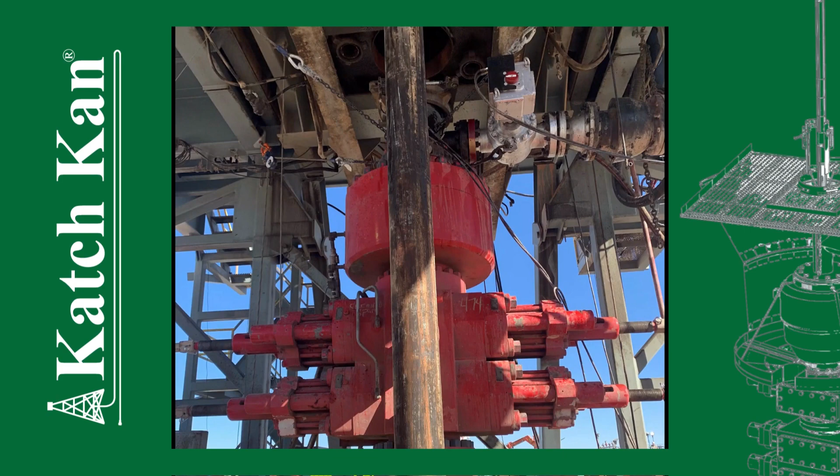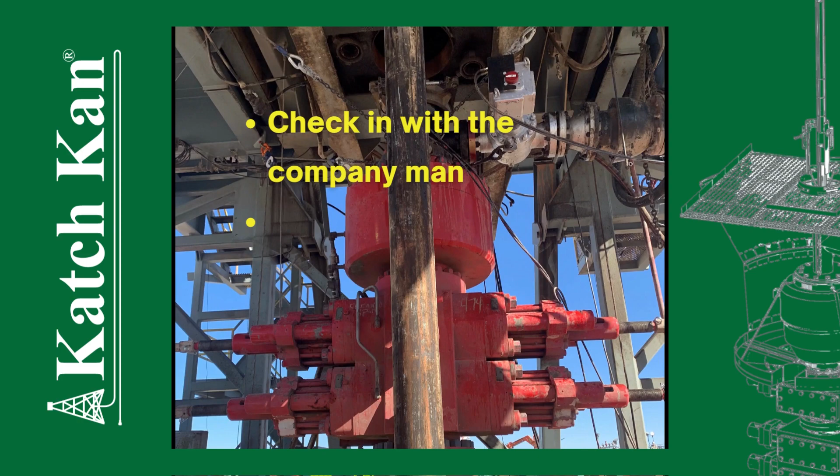In this video, we are going to demonstrate how to rig up the zero spill system on the BOP. Before you can rig up, always ensure you have the following ready to go. Check in with the company man, complete JSA and have a tailgate meeting with all parties involved, have on all PPE and ensure it is all ready to go.

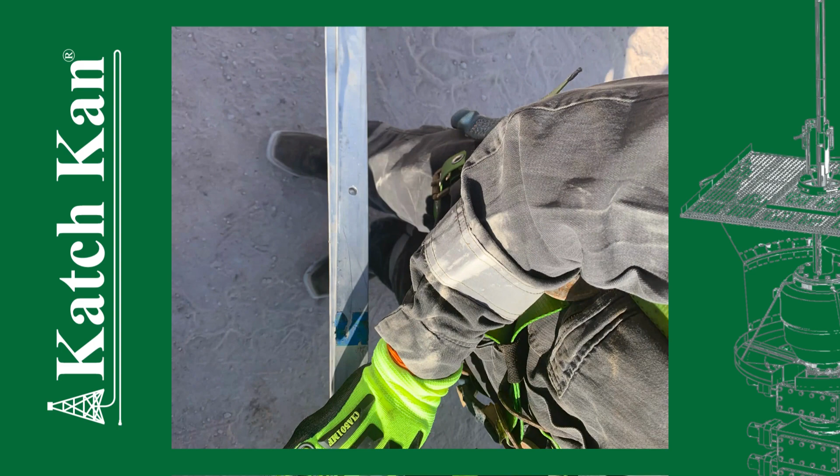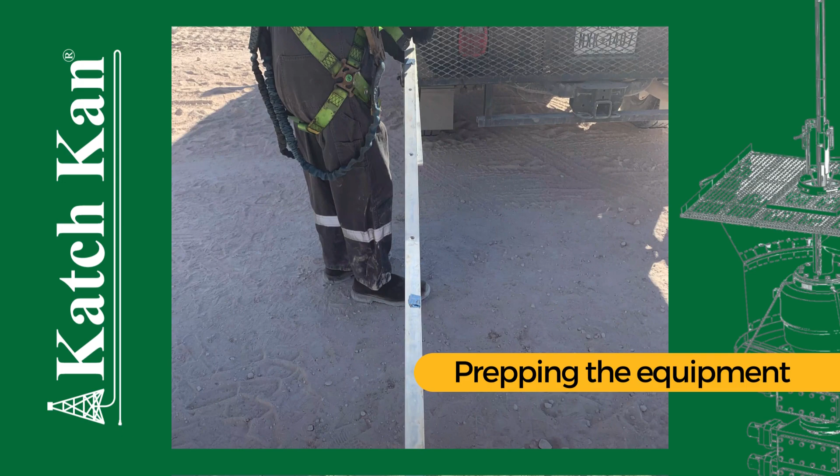Once you get the go-ahead from the company man, you want to start prepping all your equipment that is going to be used for the rig up. One person will start by putting the support bar together. To complete this, you determine the size you will need. Once this is determined, you will align the holes provided and put 9/16 bolts on the first and third hole, then tighten down with a 9/16 wrench.

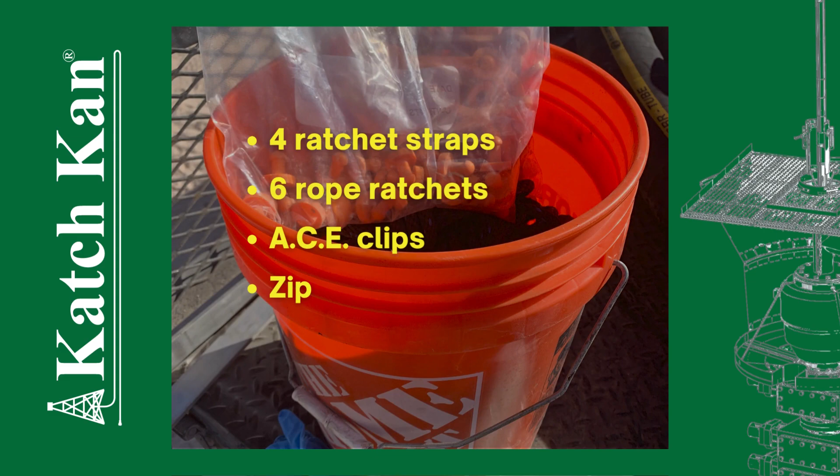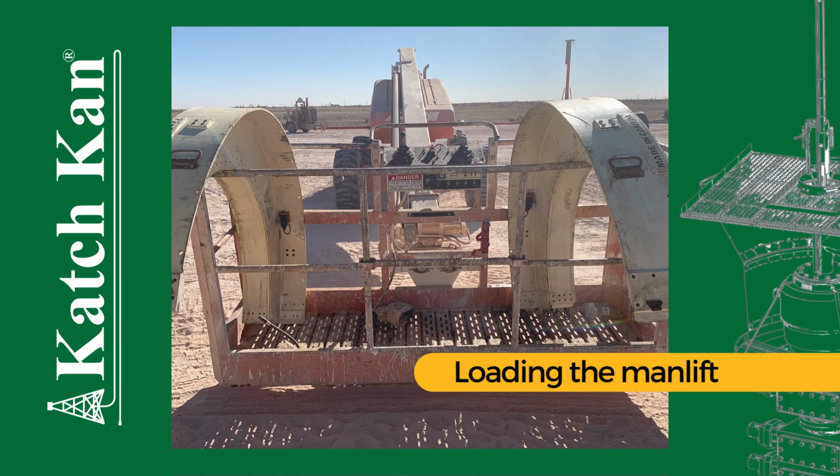You want to ensure you have your bucket ready with at least 4 ratchet straps, 6 rope ratchets, A.C.E. clips, zip ties, and 2-inch duct tape. Next, you want to load the man lift with the equipment you need to take up to the BOP. Starting with the low pro, you want to load 1/2 of each side facing inward. This will help later when it's time to hang the low pro. After loading the low pro, you will load the bucket of consumables, H-seal, and your ace as well.

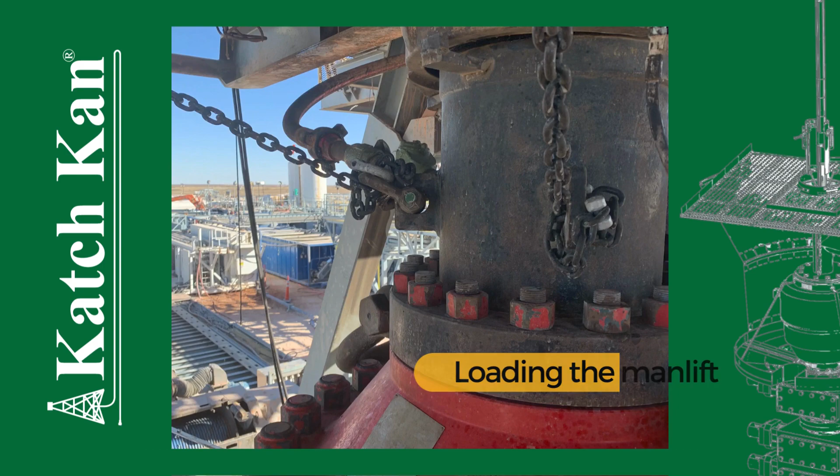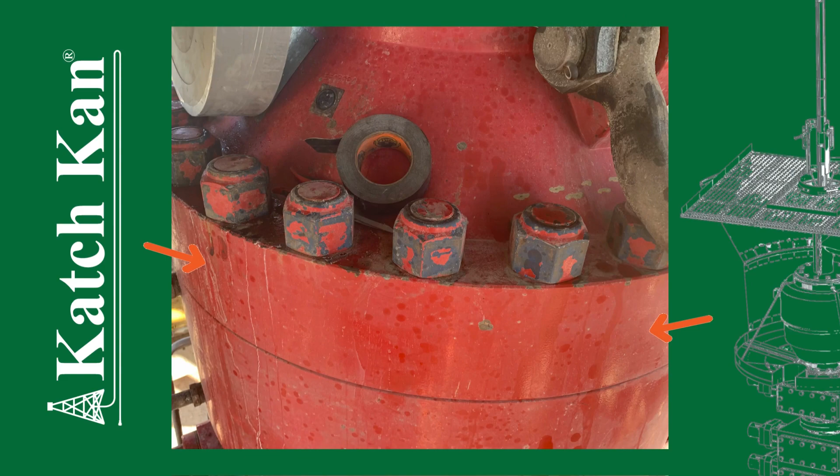Next, you need to go up on the man lift and determine any obstacles you may encounter during the rig up, such as, and not limited to, 2-inch lines, tiebacks and turnbuckles, orbital valve, and any other lines coming into the BOP. For this rig up, it has been determined to place the low pro on the Hydril due to obstacles in the way. This is the best setup for this rig up.

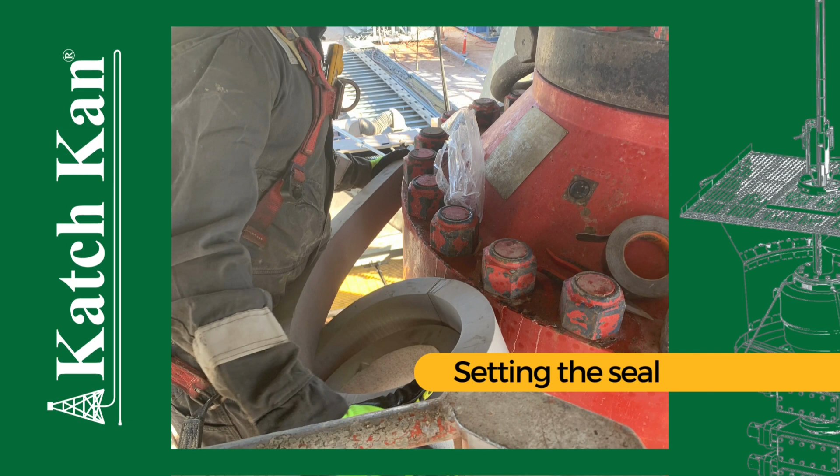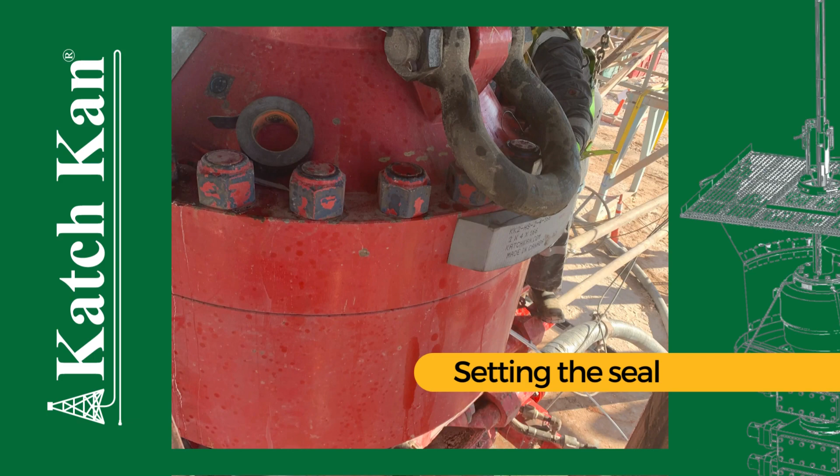The next step on the rig up is setting the seal. The location the H-seal will be placed must be as clean and dry as possible. Once you've determined where you're going to rig up the low pro, you will unwrap the H-seal from the plastic. Handing the H-seal over in a clockwise motion, you will start wrapping the seal around the determined location.

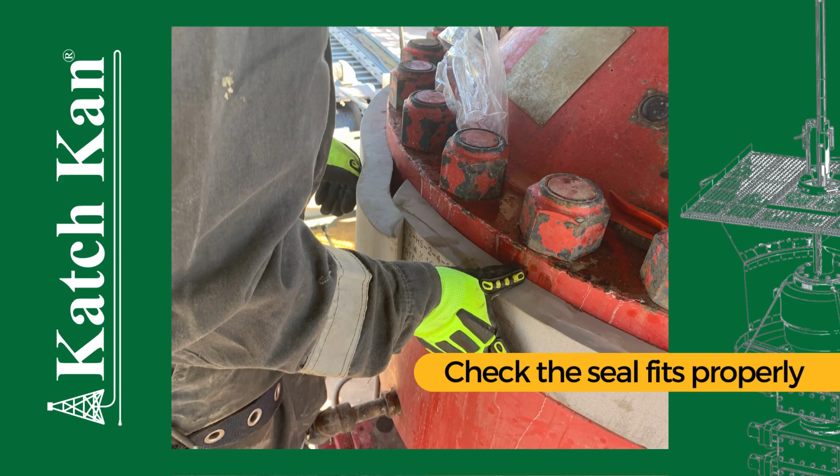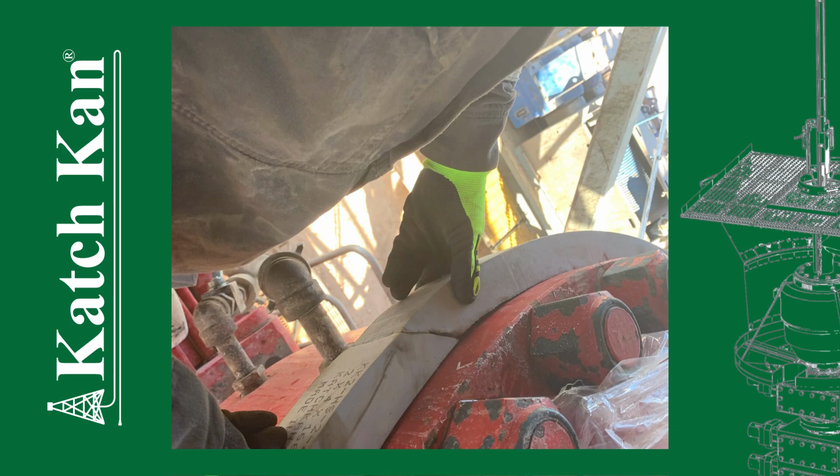Once the H-seal is wrapped all the way around the determined area, the next step is checking if the H-seal needs to be cut to fit properly. Not all H-seals need to be cut. You only cut the seals on a need-to basis. When you must cut the H-seal, you need to cut the H-seal at a 45-degree angle to match the other half of the seal. This is done to prevent any gaps in the seal that may cause leaks from the system.

After the cut to the H-seal has been made, your next step is taping the H-seal to stay in place. To accomplish this, you want to start from the right side of the H-seal past the meeting point, placing some tape on the H-seal. Then you pull the tape tight in a clockwise motion, handing it over to the person on the other side. You continue this until the H-seal is deemed tight enough and will not slide up or down.

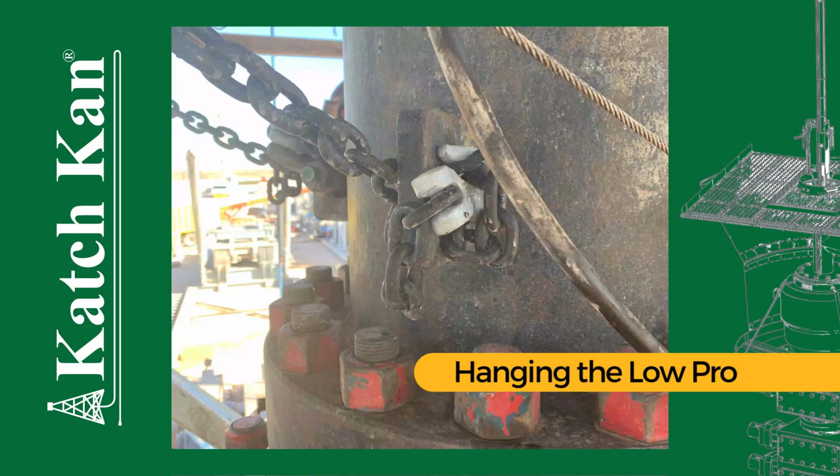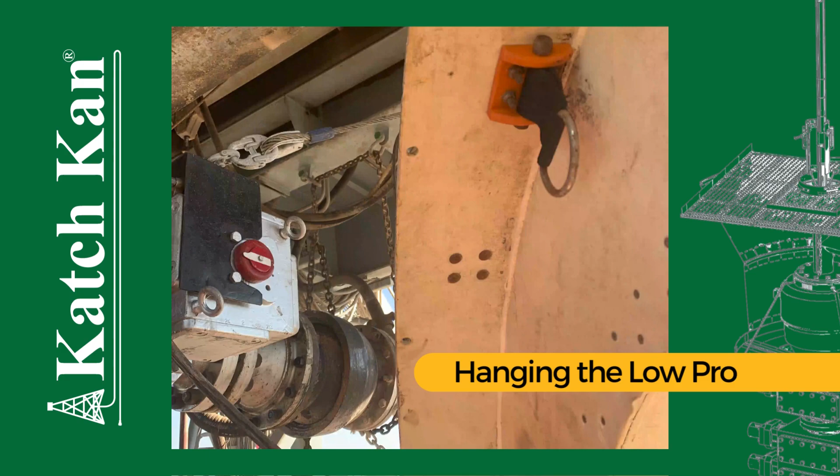We have now come to the next step, which is hanging the low pro. Using 4 rope ratchets, you hand 2 over to the person on the other side of you and keep 2. Next, you will hang the ratchet portion of the rope ratchet on the eyelets of the BOP. Then you will both open 1 rope ratchet each on the same side. It's recommended to hang the first half of the low pro on the non-mouse hole side first. Your partner will then give you the hook end of the rope ratchet from his side.

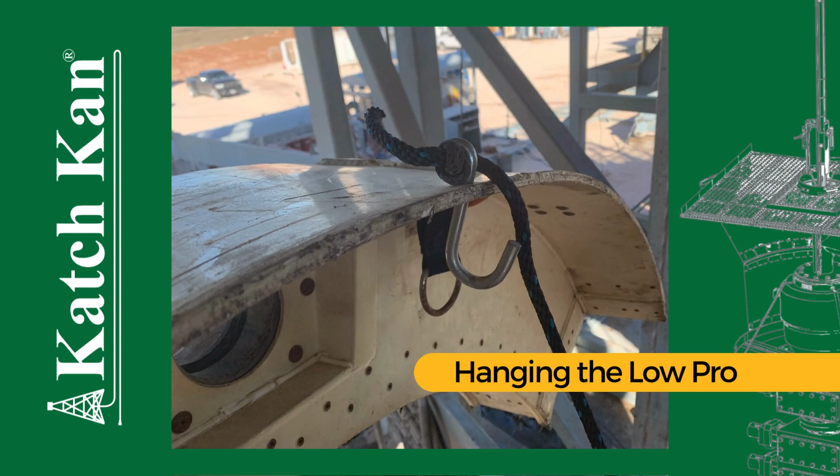Once you have both ropes, you then will place the hook from the rope ratchet into the pre-drilled holes on the low pro. To have the best balance possible, you want to use the holes closest to the D-ring on the low pro. Next, you want to wrap the hook 3 times with the rope to prevent the hook from slipping out of the hole. After both hooks have been placed on the low pro, next you will slide the low pro out of the man basket slowly to the person on the other side.

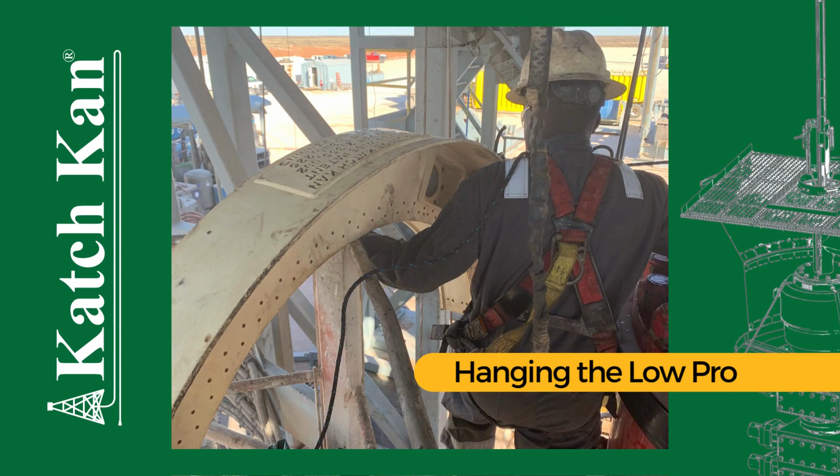Using the rope ratchets, pull up on the low pro side and pull out the slack of the rope on the ratchet side. Do this until the low pro is set at the right height to be placed. Follow the same steps for the mouse hole side of the low pro to be hung. See an example clip on the next portion of this video.

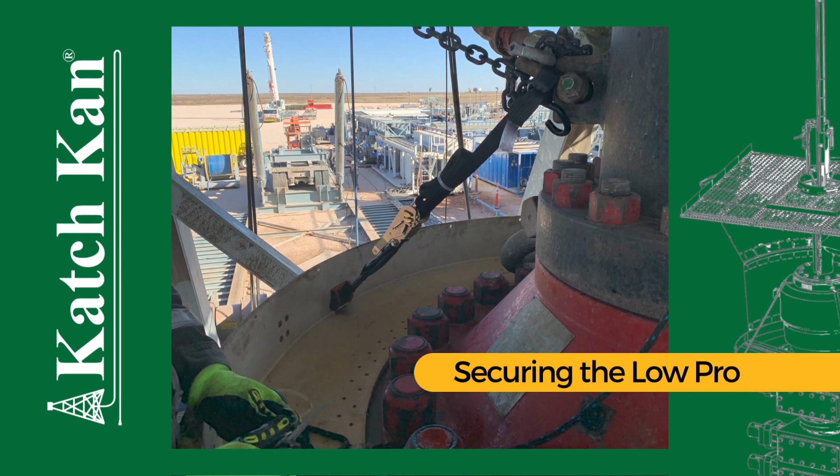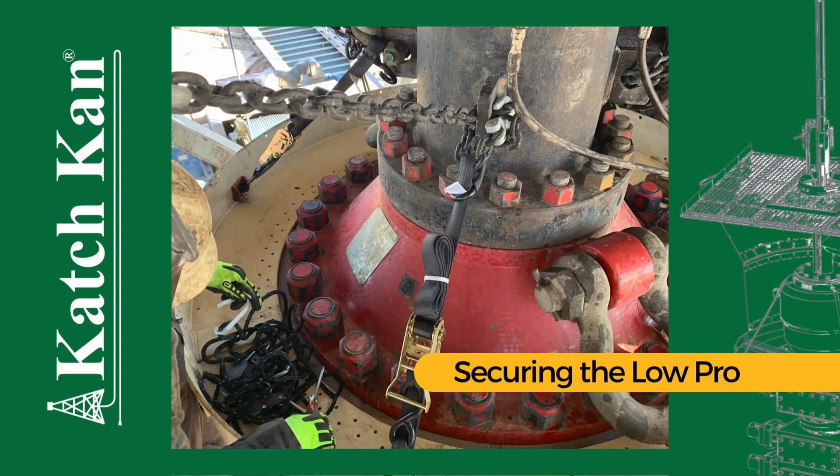Now you will secure the low pro by putting the ratchet straps on. Hang the 4 ratchet straps in the eyelets and connect them to the 4 D-rings on the low pro, tightening the ratchet just enough for stability of the low pro. Once the low pro is secure, remove all 4 rope ratchets.

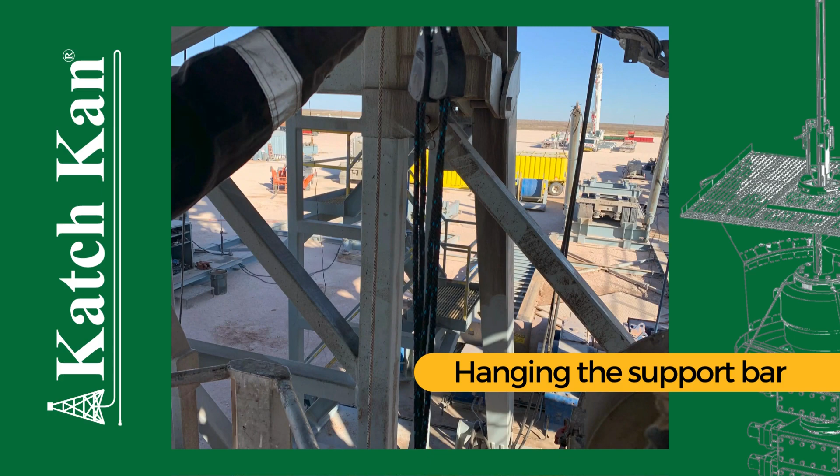Next step will be hanging the support bar. You will first need to determine the diameter size you will need for this rig up. The support bar can adjust from 10 feet to 16 feet in diameter. After, you will determine where you want to hang your rope ratchets for support. Once a spot is determined, you will then take the ratchet side of the rope and hang it in the determined location. Once the right size is determined, pull the support bar above any obstructions.

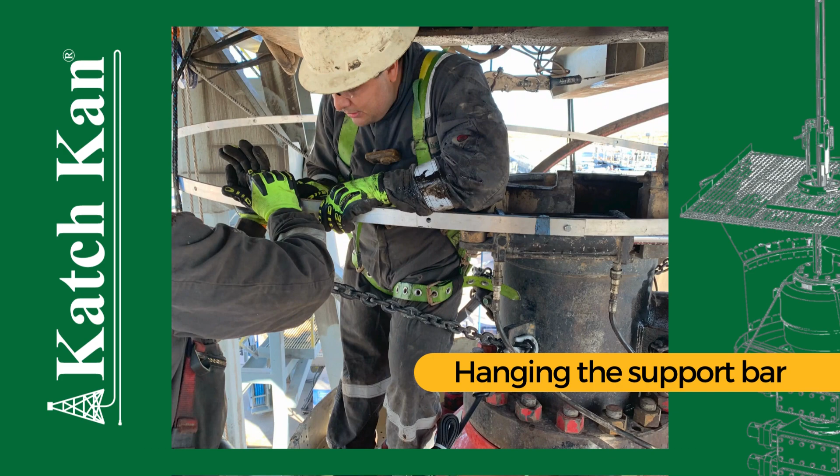While holding one end, have the other person pull the other end around the BOP, handing you their end. Hold the 2 ends together and overlap to create the determined diameter, ensuring at least 2 holes are aligning for stability. Close the support bar by using 9/16 bolts. Secure the bolts by tightening down with a 9/16 wrench.

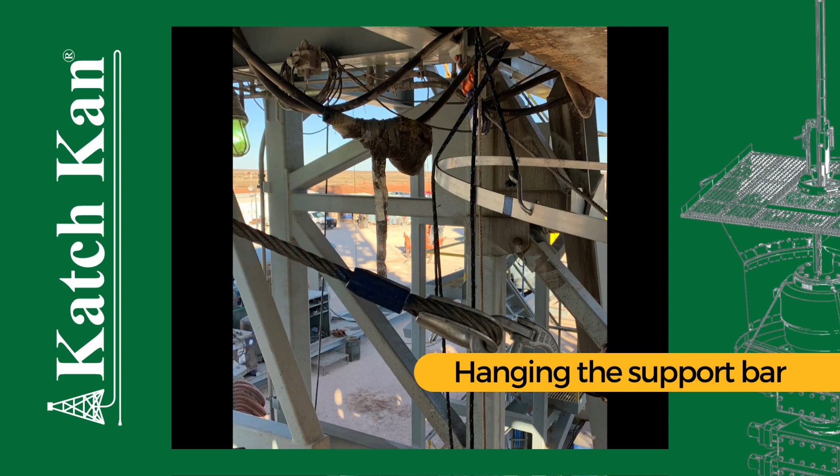Hang the support bar at 4 points using the rope ratchet. Ensure they are evenly spread out. Pull up the support bar to a comfortable height to start hanging the ace. Hanging the ace is the next step.

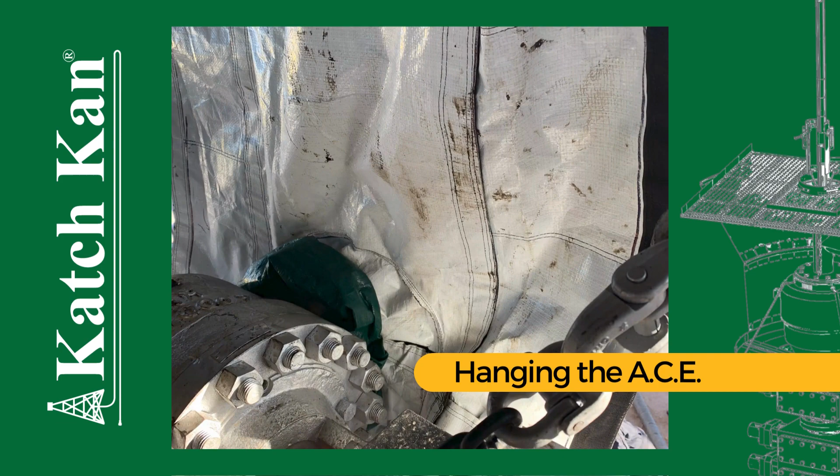Start with the flowline sock panel and, using the A.C.E. clips, hang the top section of the panel. Determine the height needed for the flowline sock to set properly. Once determined, open the sock portion of the panel and wrap it around the flow line. Tape the end of the sock around the flow line to prevent any leaks.

After the sock panel is in place, start hanging the top portion of the ace to the support bar, going in a counterclockwise motion. If there are any obstructions, determine how to best fit the ace around them. Once the top of the ace is hung, pull up the support bar to the determined height, then connect the bottom of the ace to the low pro, using the grommets on the ace and the pre-drilled holes on the low pro. Pull the ace up all the way for a snug fit.

After you complete hanging the ace, you will next put on the fittings and hang your hose. Depending on what style of low pro is being used, you will need to determine what type of fittings will be needed. If using a 45-degree fitting in cam lock, ensure you have the fitting disassembled and assemble it on the low pro after it is hung.

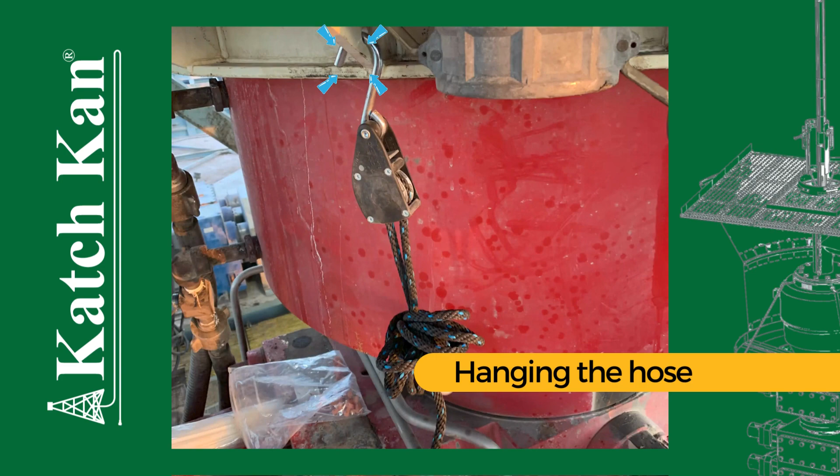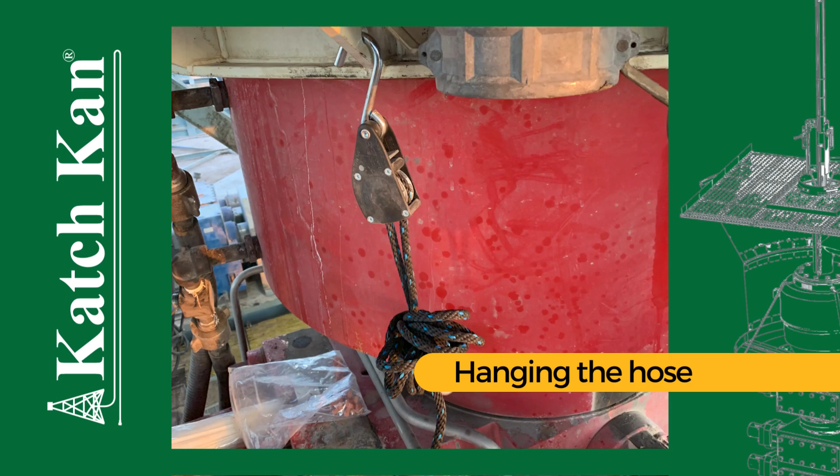Take a rope ratchet and place the ratchet portion in the pre-drilled holes on the gusset of the low pro next to the fitting. If a hole is not there, hang it on the top ring of the low pro. Take the hook end of the rope ratchet and tie it 10 to 12 inches below the cam lock on the hose.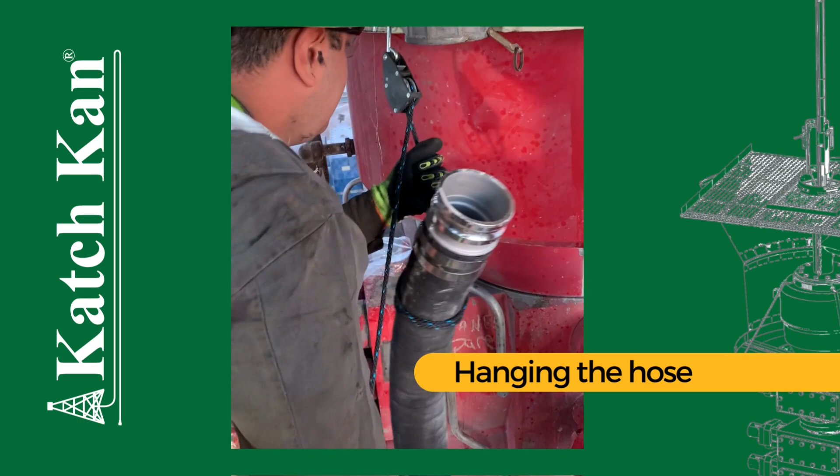Utilizing the rope ratchet, pull on the hose and pull out the slack of the rope until the hose is at the desired height. Insert the cam lock onto the fitting of the low pro, then begin to lock the cam lock in place. Once locked into place, run the hose to the determined location.

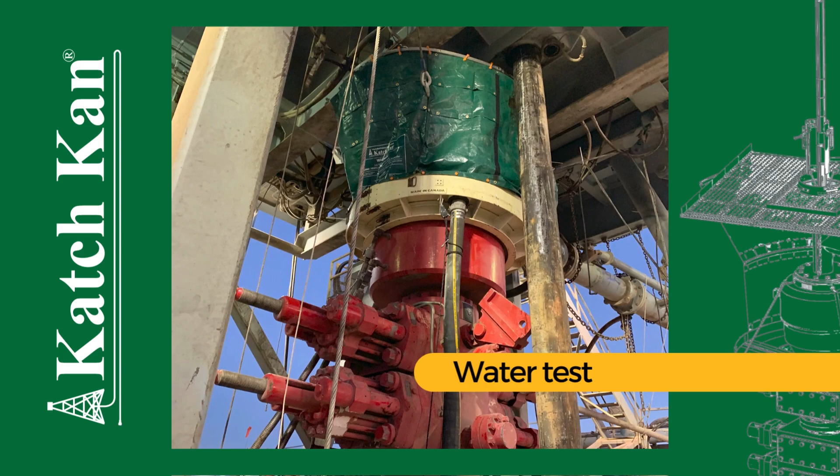Once the rig up is complete, you need to ensure there are no leaks by doing a water test. Go around and look at the rig up to ensure everything is in place and working properly. Clean up any trash and take quality control pictures.